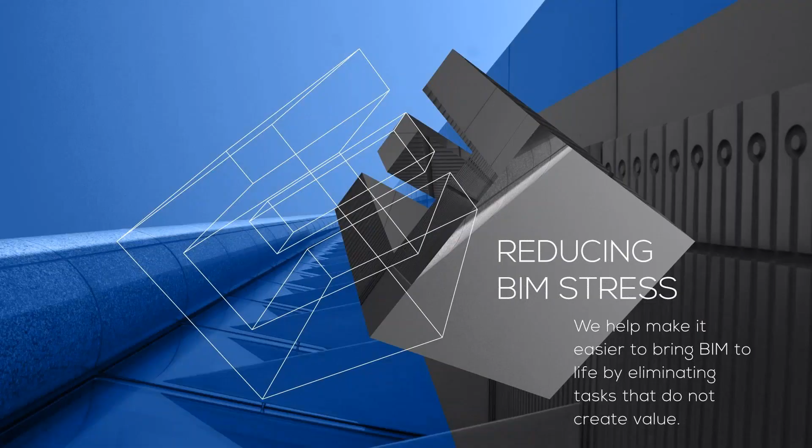So AGACAD, we are developers of different tools. We have a lot of them and we sell them worldwide. We do the training demos and so on, and Itannex, our partner, will keep you in your region. Our promise to our users is to reduce stress while implementing them, so we will continue to make these tools better and better, so don't worry about this.

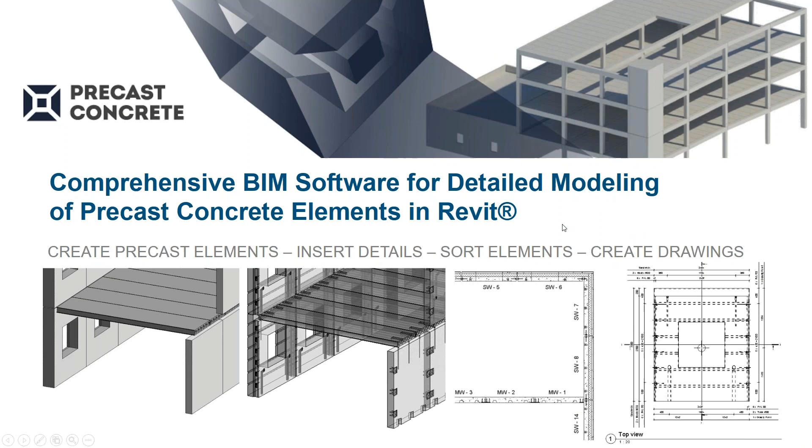This is all of our tools which we have currently in our portfolio. So we have Precast Concrete, wood framing, different cut opening, management of parameters, and different kinds of tools. Today I'll talk only about Precast Concrete. It can create elements, it can insert details, it can sort elements, and it could create drawings. It will help you while working with modeling and documenting precast elements.

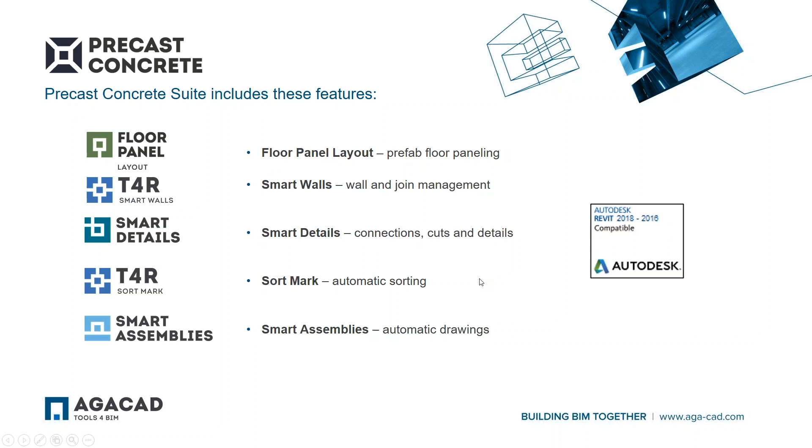So these are all the solutions included in Precast Concrete. We have floor panel layout to create prefab floors, then smart walls to split the walls into panels, then smart details to insert the elements and connections, sort mark to automatically sort elements, and smart assemblies to create drawings. So you'll see how to split walls, how to insert connections, how to sort elements, and how to create drawings today. All 4 solutions I will show.

And now I will switch to Revit screen. Okay, I will minimize this window. Now you should see my Revit screen. I'll make some things in this model. If you have questions, just write them, I will try to answer them at the end of the presentation.

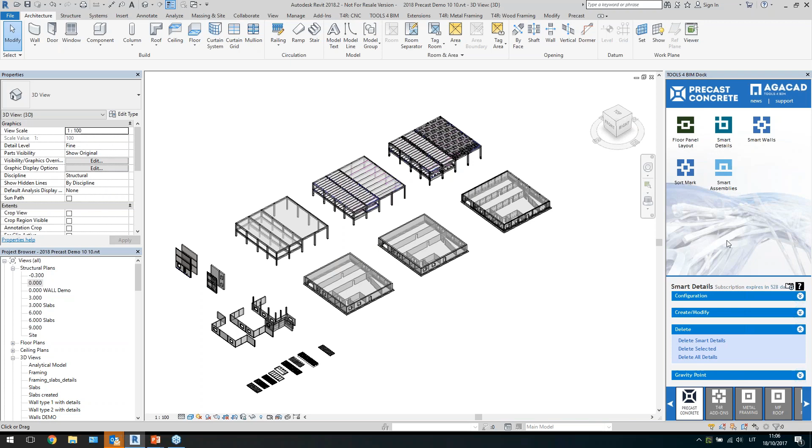Now on the right side you see Tools 4 BIM Dock. This is our solution which you can install in Revit and try our solutions for a 2 week period, free trial. Over here you see Precast Concrete, so today I will talk about this one. You can apply this for framing elements, floor elements, or wall elements, but today it's about walls.

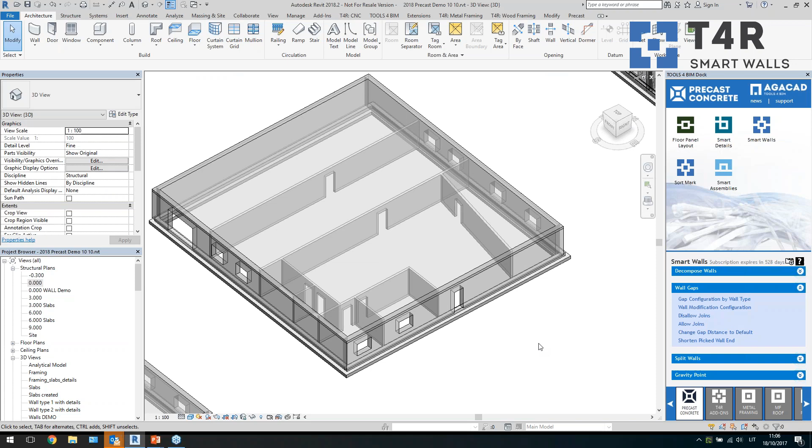So let's get started. First of all, I will select the Smart Walls tool, and over here we have different commands, but let me show you just a couple of them, how to work with them. First of all, I'll switch over to the floor plan view so you could see it better.

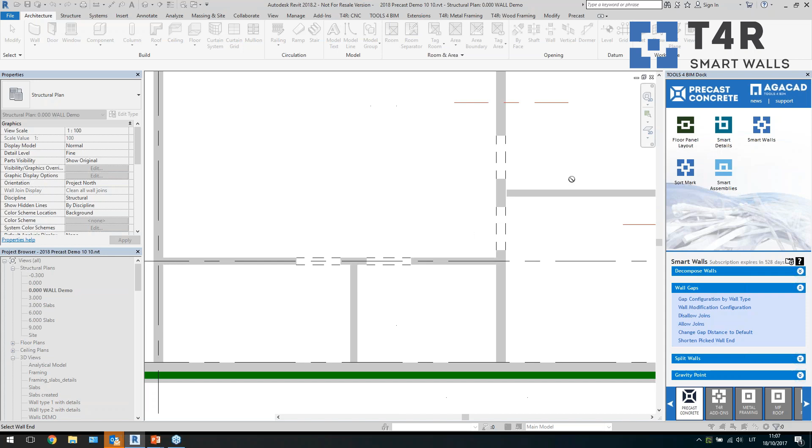First of all, I will use Shorten Picked Wall End, and what I want to do is when I select the end of a wall, you will see that walls are disjoint and the gap appears between the walls. So you can go around your walls like this, for example, just to make sure the connection changes between them. So in the corners, I can switch over the connection between elements. So this is one of the options.

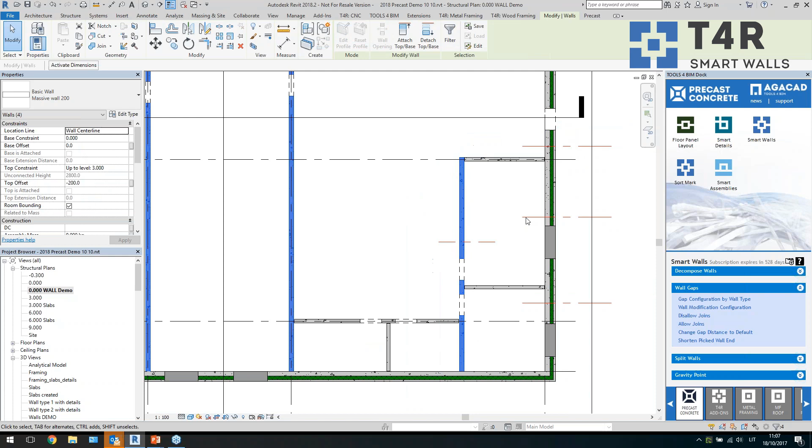Then let's say I will select all of these, this type of walls, in the window, and I will disallow joins.

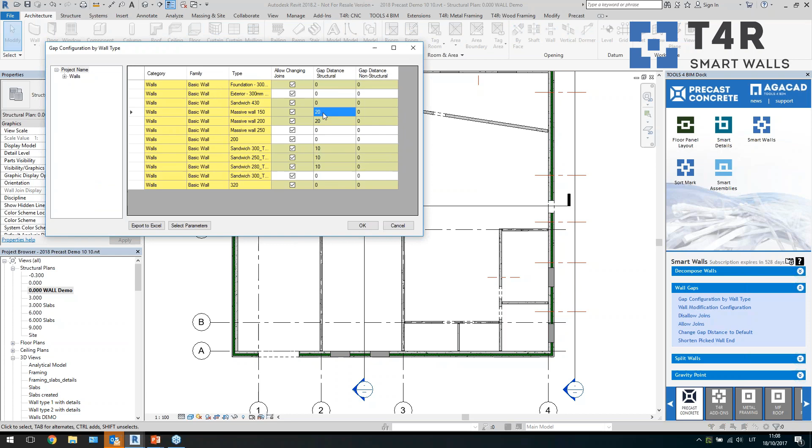So what it will do is disallow the join between walls and add this gap between the walls. So why do I have this kind of gap? We have gap configuration by wall type window, so we can set up what kind of gaps we want when we disjoin walls or when we split the walls.

To split walls, we have an additional split wall menu. Here we have some settings for how to split around the openings, what should be the size of the panel - we can change that - and what should be the maximum panel size. You can use these settings to split your walls.

So let's say I will select a couple of walls and split it from openings. Now you'll see this panel around the openings is created.

But let's see another command. Let's say I select a couple of walls again and split from the selected direction - split from the start. We have some limitations for the minimum size of the panel, so you can change these settings in different ways, and it will not split if it's not meeting required dimensions. Let me do that again.

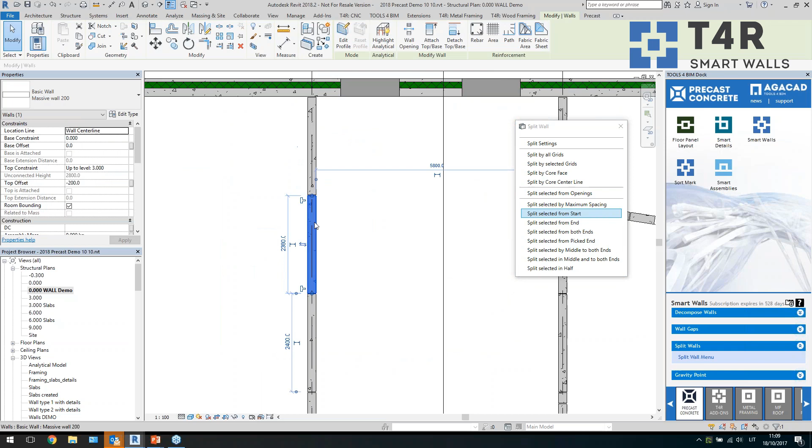And this time you see I have my wall panels created, just split in the same panel sizes, and the leftover is left like this. So we can split them like this.

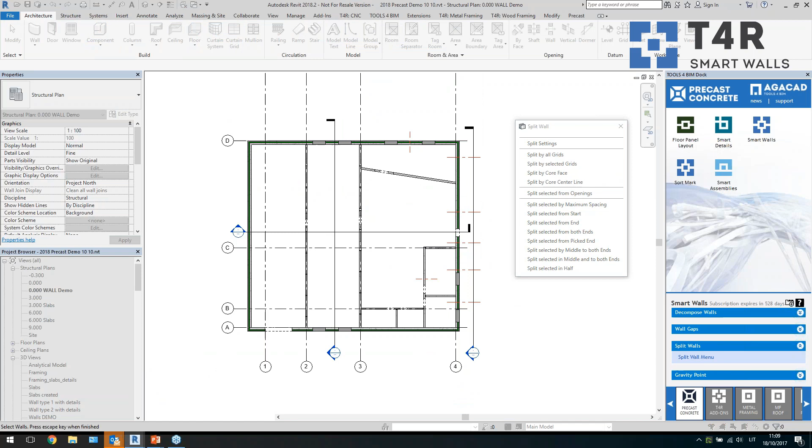Another option is to split in exact locations. Let's say I have a grid line - I can draw it in the place where I want it to be, and then select my grid lines and split by them. So split by grid lines, this wall, hit escape on keyboard, and then we have these elements created.

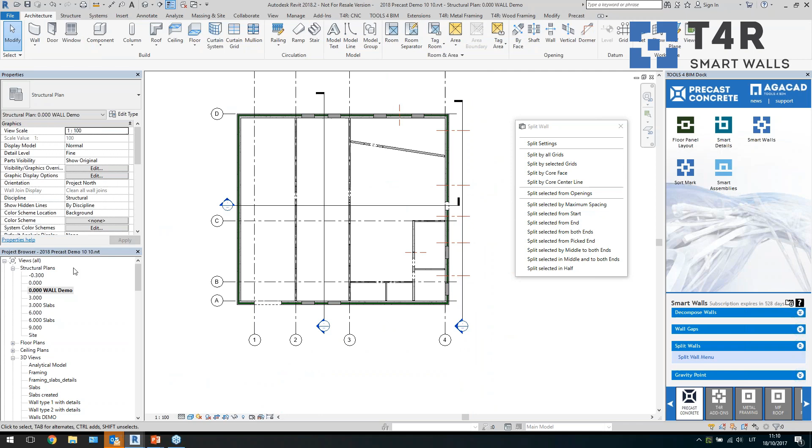Let me do that one more time: split by grid line, escape, wall, and escape. So I would have another panel over here. You can go around, play with it, just make sure it is like you want it to be.

And the next step is, if I'm good with the panels, I can go around, switch over to Smart Details, then insert some details. So how Smart Details work is that it will place your elements based on configurations.

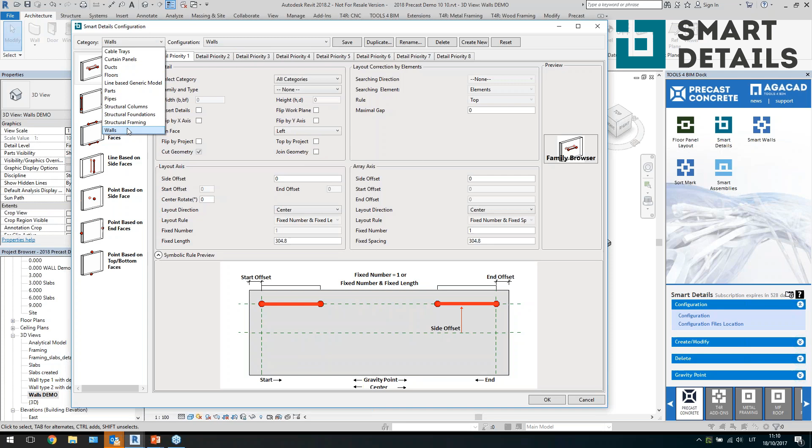Let me show you the configuration window. Here you have different categories to work with Smart Details - you can use Smart Details on curtain walls, ducts, floors, framing elements, columns, walls, and so on. You can place line-based details or point-based details on the selected faces, as you can see in these pictures. Let me switch to one of the configurations.

Let's say on the top face of wall I want to insert this family. I can select families from the project, which are already in the project, or I can browse it from this family browser. So I select my family, which I want to insert, and select it to insert.

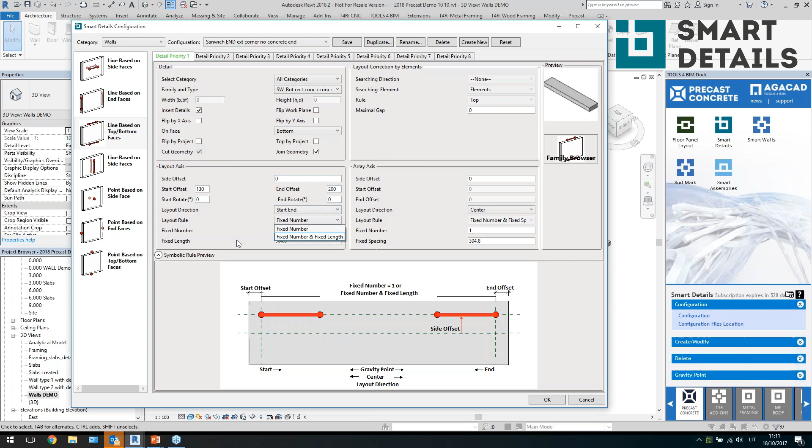I have flipping options - I can select if I want to place it on the top, on the bottom, or on both faces. At the layout axis, I have the possibility to define the rules for how it should be inserted. These are the settings for how this detail will be inserted in one direction, and these are the settings for placing it in the other direction. You can do that for line-based details and for point-based details.

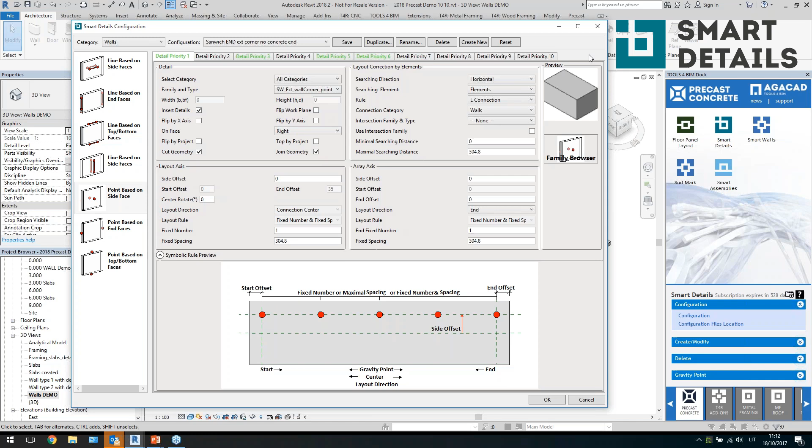For point-based details, additionally under layout correction by elements, we have the possibility to search vertically or horizontally for other elements' intersection. Let's say in this case I'm searching horizontally for other walls and for the connection between the walls - basically when we have a corner between the walls. We also have other types of connection between different elements, which could be beams and so on. So we can find intersections and place the detail only in this kind of situation, which helps you quickly insert the details.

I'll close down the configuration window, and I want to mention that all the configurations are saved in a desired location, so you can keep your configurations in different places. Let me close down this window, and let's go ahead and insert a couple of details.

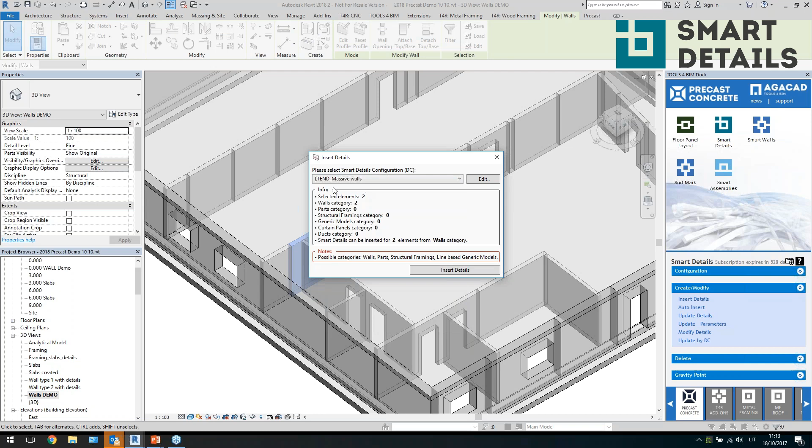I will select a couple of walls, click on Create, Insert Details, and now from the list of configurations I just need to select the configuration which I want to apply for these walls. Where is it? Okay, it's over there. So I select the configuration I want to use and click Insert Details, and it will place the details on the selected elements based on the configurations.

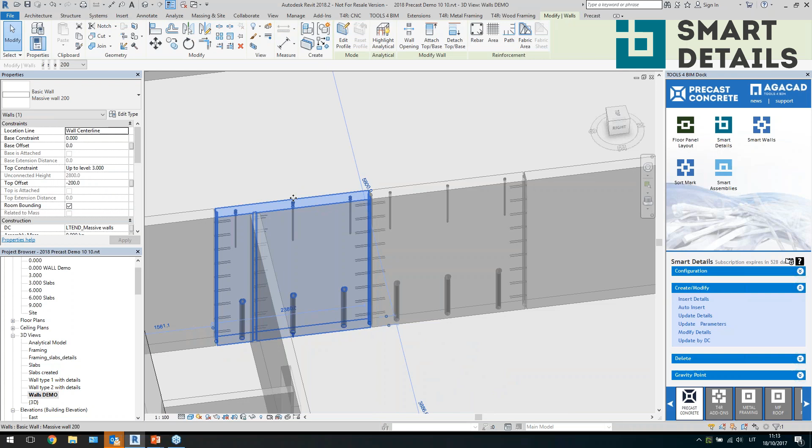So we will see the result. Okay, so now it's starting to place. Okay, that's the result. So you see now, let's say I selected to place some details on the top, some details at the bottom, some details at the edges, at the start and beginning, also the cut at the end and beginning of my wall.

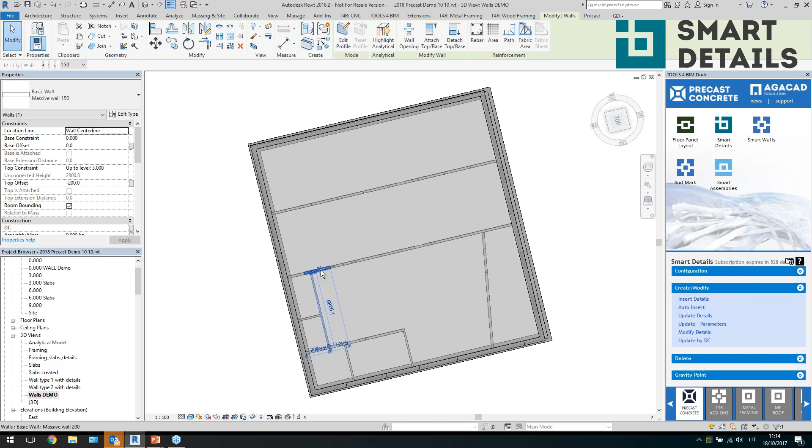And we have a little bit difference between these walls, because in this wall we have intersection with other wall. So that's why the solution automatically finds that we have T connection between these two elements, and then it will place this detail only if we have T connection. For this wall we don't have, so we don't have this detail.

If I select this detail and click on Modify Details, it will bring me straight to the configuration of this detail, and you will see that I was searching the T connection for these details.

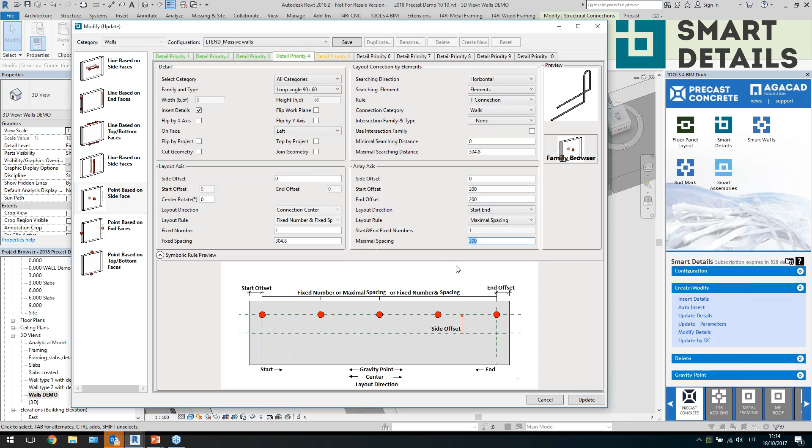And anytime you can make individual modifications for the selected wall. So let's say you need to make some small tweaks. Let's say in this case, I just change the spacing of these details. So you can anytime modify, delete, update details, follow the changes in your project and so on.

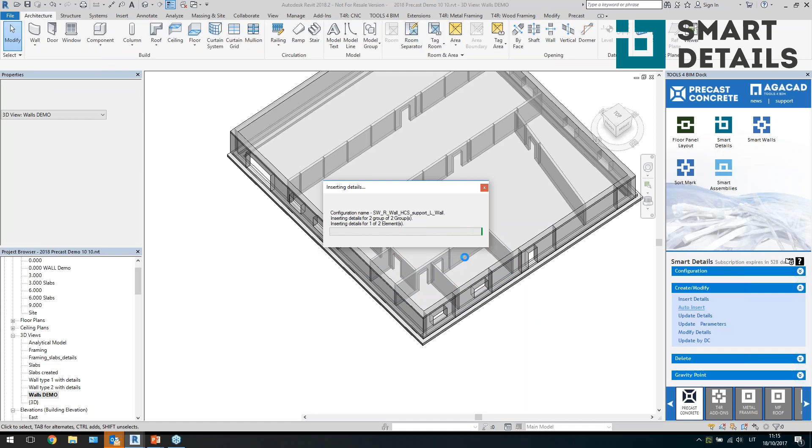Okay, I will select a couple more walls and show you other situations. Let's say I will now click on Auto Insert. And what does it mean? It will read the name of configuration from the properties of the wall, and it will apply that configuration which is selected for these walls. So I selected two types of walls, so that's why I have two different configurations.

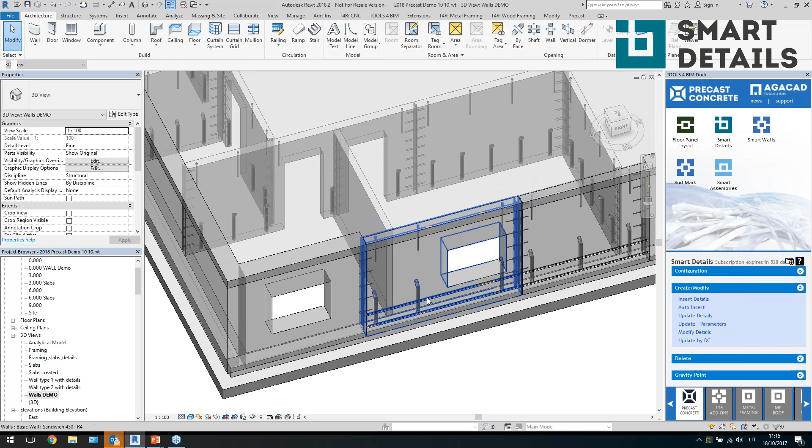So for this wall, for example, I have a different kind of loops. I have some other kind of details. I have some void at the top just to place hollow core slabs and so on. I can show you in the plan view how it looks. Over here I have this kind of cut just to place my elements like this. So I can go around and create stuff like this.

Over here, let's say I have an L connection between walls. So again, this detail was inserted only if we have an L connection between walls. So these are a couple of features.

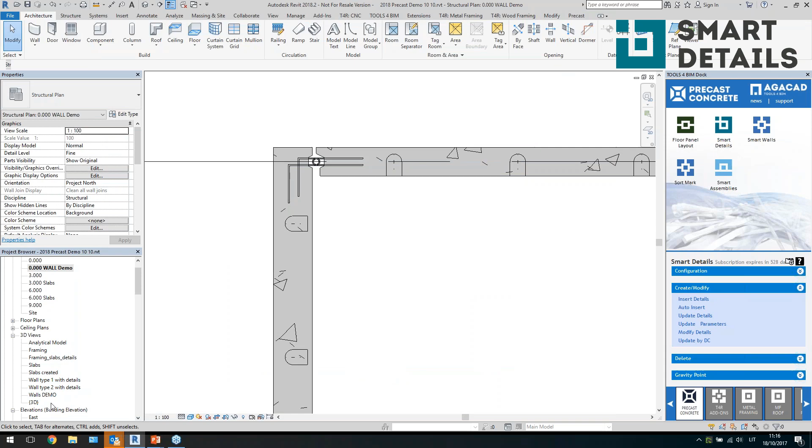Let me switch back here. And you see I have a window here, and I'm missing this kind of detail. So let me show you why. It's because we also have the possibility to check if there is enough solid element space.

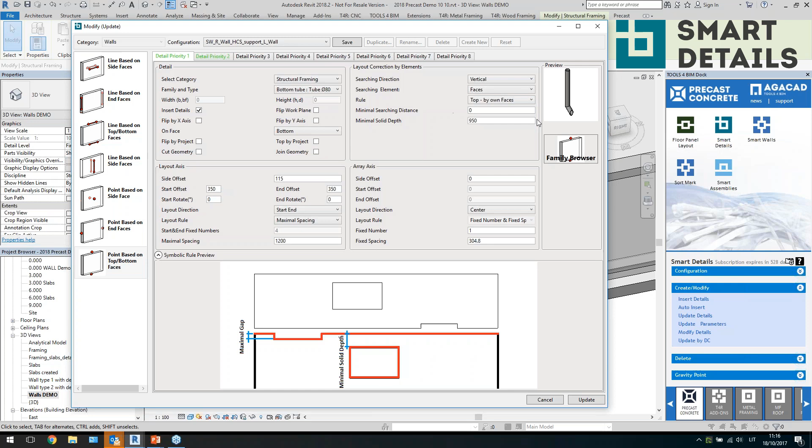So you see in this picture, we can check it. If there is enough space, we'll insert this detail. If there is not enough space, it will not be inserted. So you can see that it was not inserted under the window.

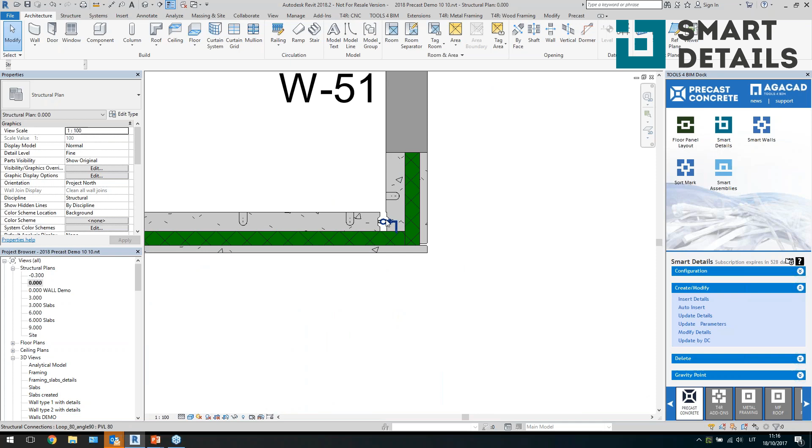So these are a couple of examples. I will show you maybe an already finished result over there. Switch here. So a couple more examples for the sandwich walls. So connections are more complete than in the previous example, but yeah, basically that's what we can do with this type of walls. Then let me switch back again to 3D view.

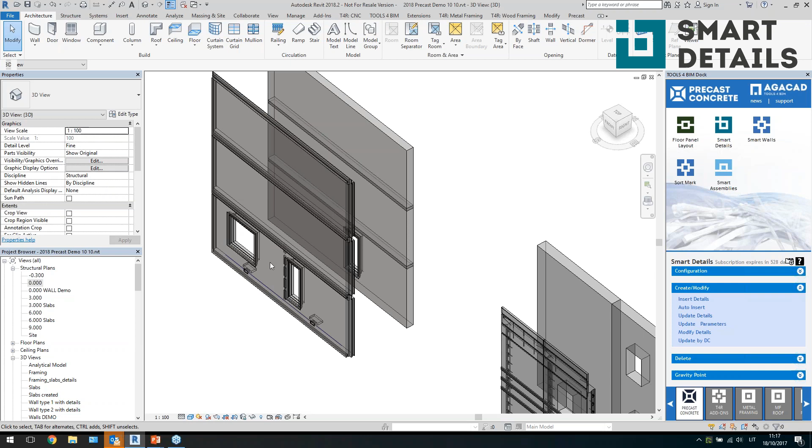And I have a couple more different walls. So let's say over here. So I will switch over again to the plan view, to this view, and to the section view. Let's say I have walls like this. I have a window inserted already.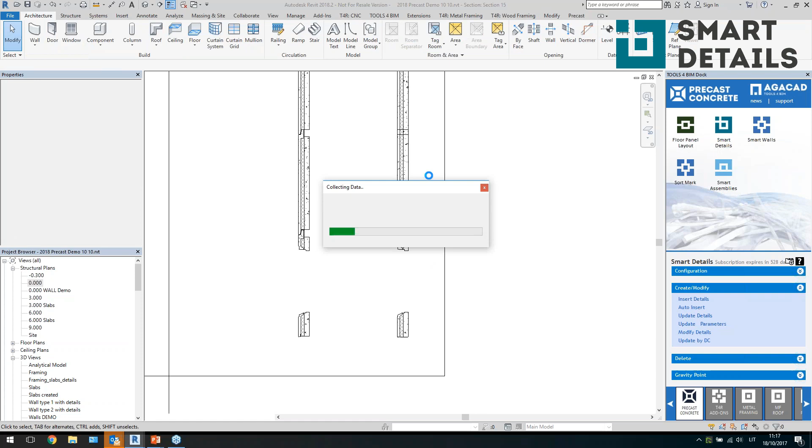So I can select these walls and I will show you another example. Just by clicking on Auto Insert, I'm reading the name of configuration in the properties. Let's say this wall has a smart detail configuration parameter and it has the name of configuration which should be applied for this wall. So it's the same for this wall and this wall.

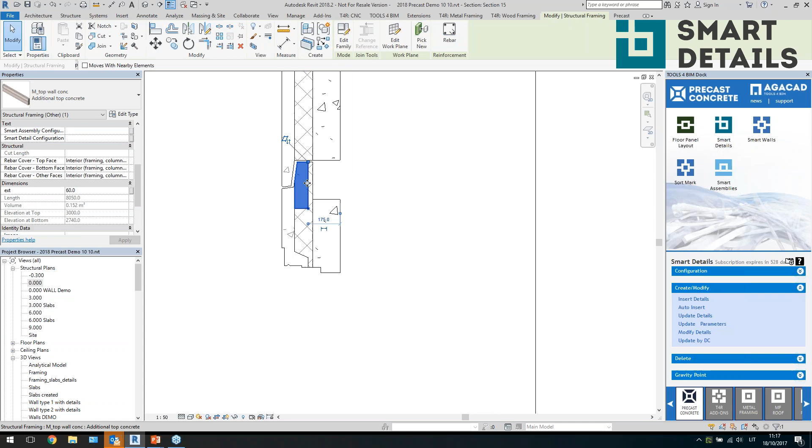And this time I have inserted just a line-based element on the top to cut the wall and then an additional concrete element to go inside the wall. So we can have pretty complex forms of elements just by using families and the smart details.

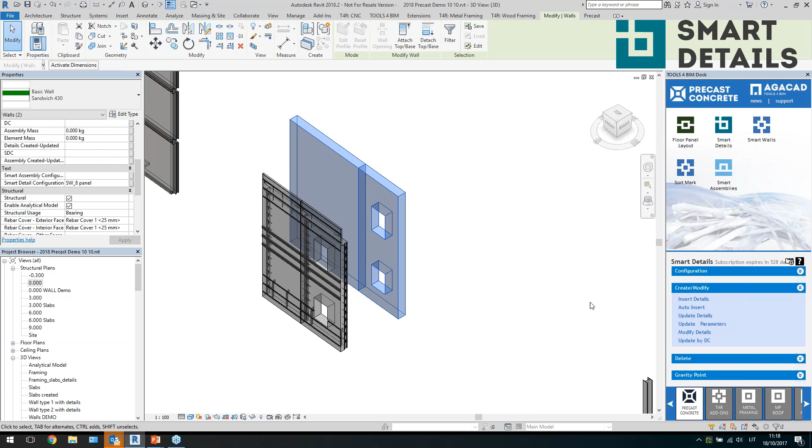Another feature of smart details is that, let's say we have different sizes of elements of the walls, right? And then when I insert details, because it's based on rules, the details are distributed across the wall. But additionally, we can read information from the host element.

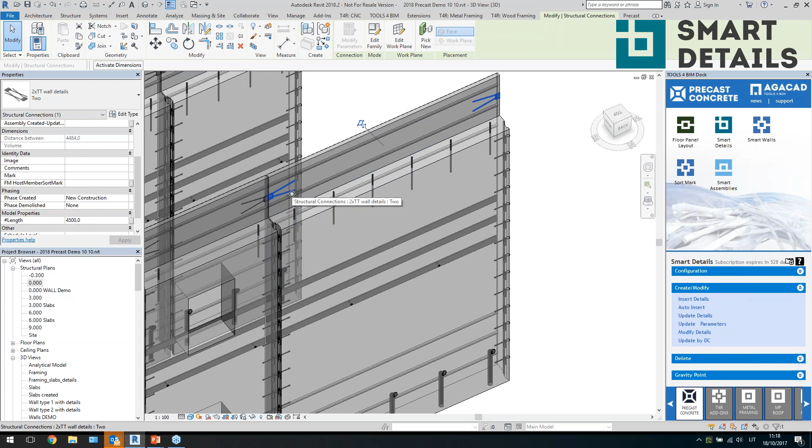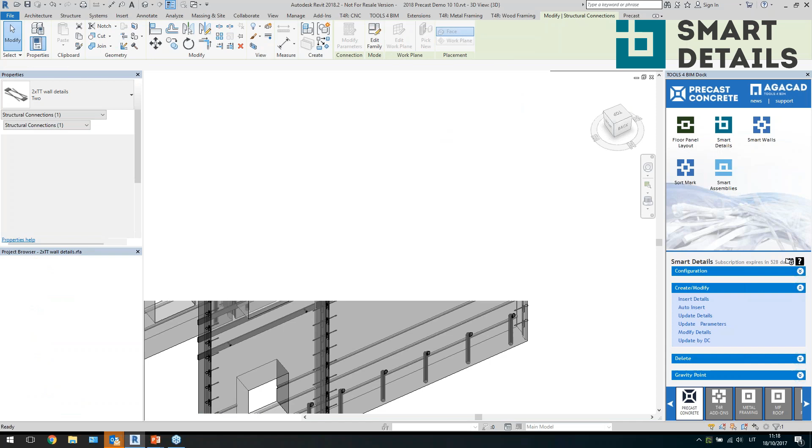So you see two details placed as one family here. The reason it follows the size of the wall is because I can read any parameter from the host element. So when I create this family, I can have this parameter reading the length of the wall. When the length of the wall is different, the distance between my details will be different, and it will adapt to the size of my wall. So that's another great feature of smart detail - you can use that on different sizes of elements.

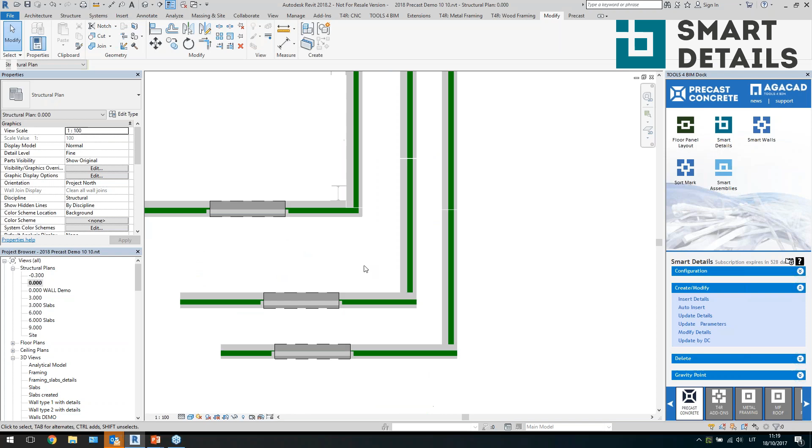Let's say another example - if I go here, you see I have another type of sandwich walls here. So I can place this kind of cut, this concrete detail, to have a good view of my walls. Over here, let's say the thickness of the wall is 300 and this one is 280.

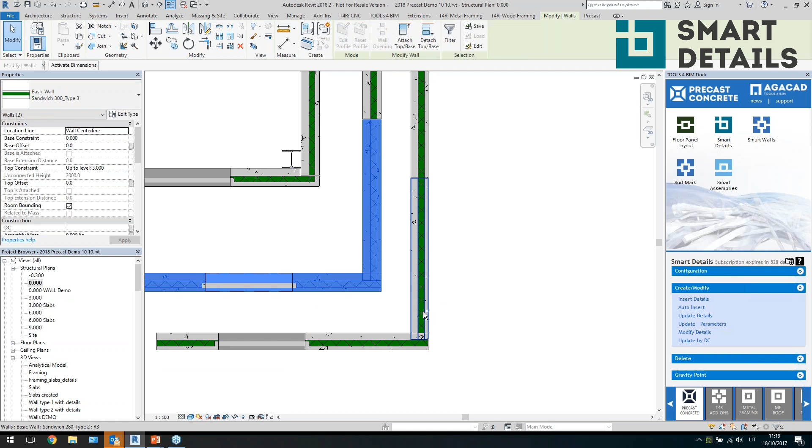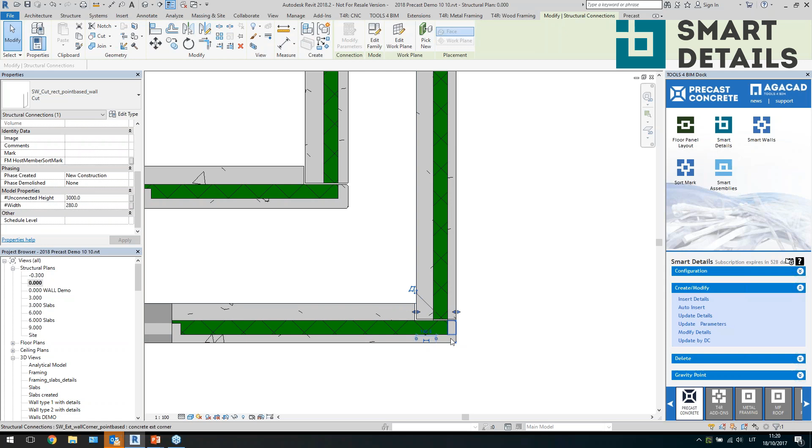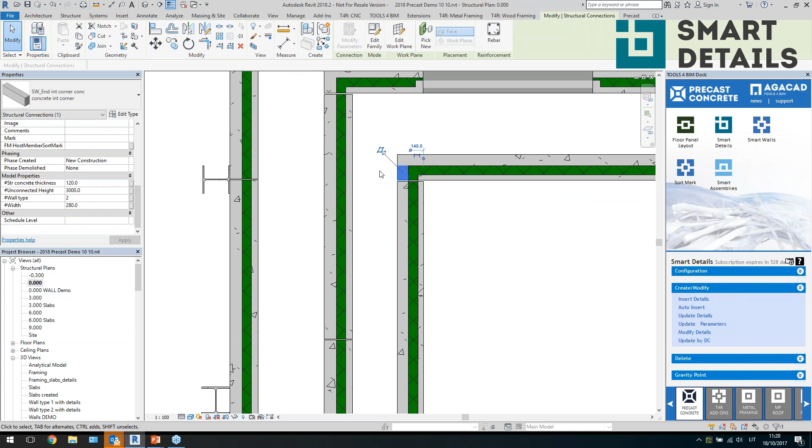But when I try to insert details into these walls, I'll do that again. I have configurations entered for these walls, so I don't need to pick that from the list. Now you'll see that this detail is reading the width and unconnected height of the wall, so it's adapting to the size of the wall. Over here, this detail is also reading the connected element's width and other parameters from the host wall. So it could be applied in different ways, and the same family will automatically adjust to the sizes of the wall.

So you don't need to create many families, you just need to add these parameters and use them.

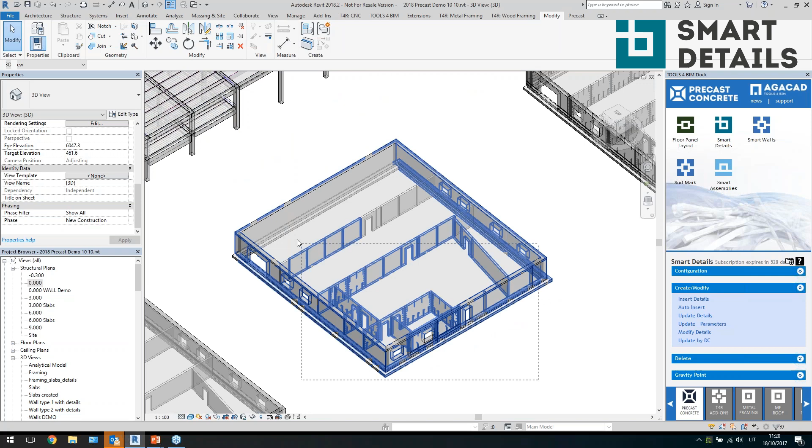Okay, so that's the way you create walls, right? And what else can you do with Precast Concrete? Before we start creating drawings, we need to have the Mark value, because the Mark value will define the name of the assembly, the type name. Right now my Mark parameter is empty.

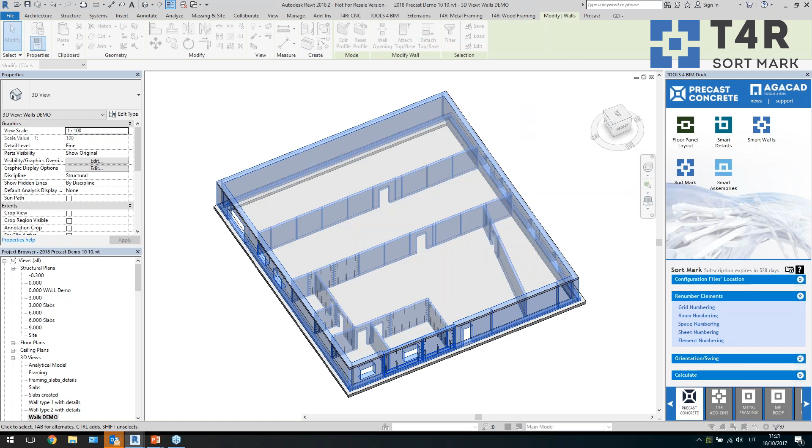So what I'll do now is switch to this view and select all of the walls. I'll filter them, just a selection, and switch now to sort mark, go to renumber elements, element numbering, and here I have the possibility to choose a parameter - where do I want to write information.

So I'll choose mark, and here are the configurations for the automatic numbering of the walls, or selected elements, or any other category of elements. It could be used on any kind of elements - for selection or for the whole category.

So we can group elements by any parameter, instance or type parameter. Then we can filter, let's say filter by length of walls, so it only renumbers selected filtered walls. Then we can add any parameters which will have influence on the mark of our walls.

Let's say I'll do it like this - I'll add a couple of these and maybe even the type name. So if these parameters are different, the number will be different. We can also use ID, so all of them will be different, but let's just stick with that.

We can also save configurations here. Then sort elements - you can sort them again by different parameters, like level name, level number, position in the plan, and so on. We can just add, let's say, position, then sort mark. In the last stage, I'll select this parameter to add to the mark - this is a calculated parameter based on these settings.

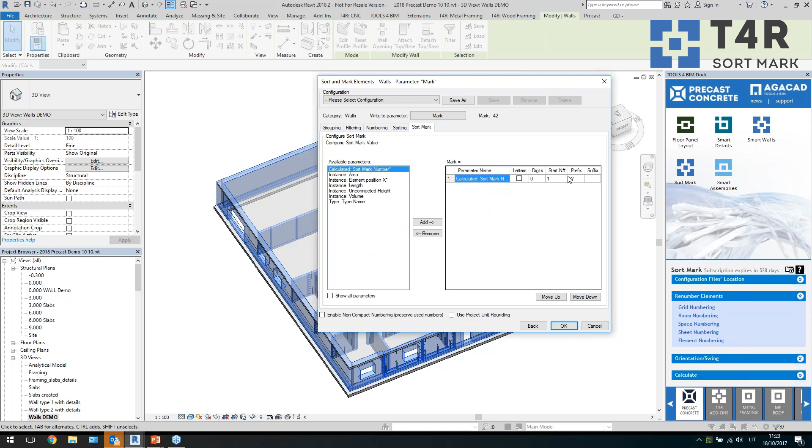So I will start numbering at 1, and I'll add a prefix like this. Actually, I can add any information here - it could be any information, but this time I just want to add a number. So I'll keep it like this and click OK.

42 elements were renumbered. Some of them will have the same mark values, probably because of my settings. So now I have the mark value for all of them, and I will select that and go now to Smart Assemblies and create an assembly - this is just another solution for the automatic shop drawings.

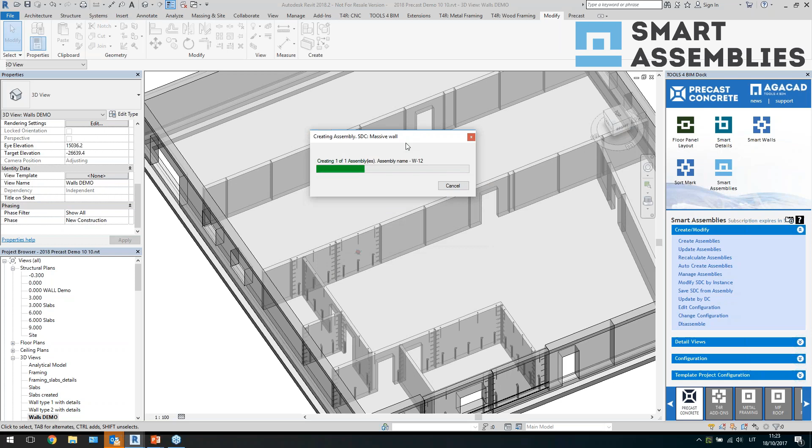So here I have some configurations for how the view should be created, and I will just create that. What Smart Assemblies will do is gather all the hosted elements together in one assembly automatically, and it will create views based on the configurations.

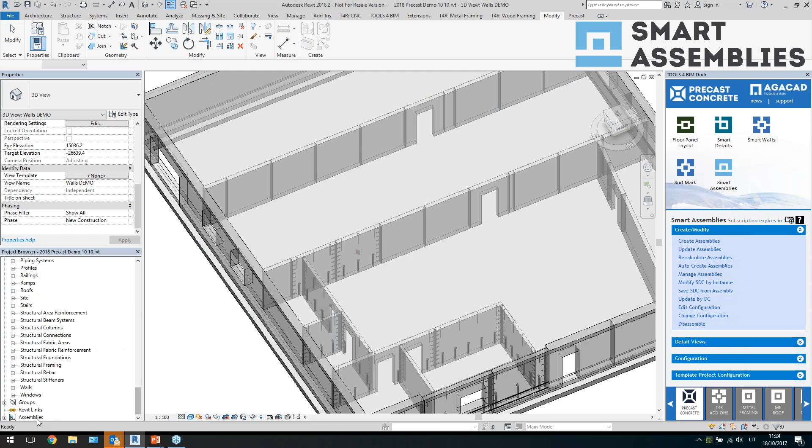It will place dimensions based on configurations, and it will place views on the sheet based on the template project. So now the assembly is created. Let me show you the result, and I will talk about how it happened. So let's switch over. Now the assembly is created, and the views are placed on the sheet.

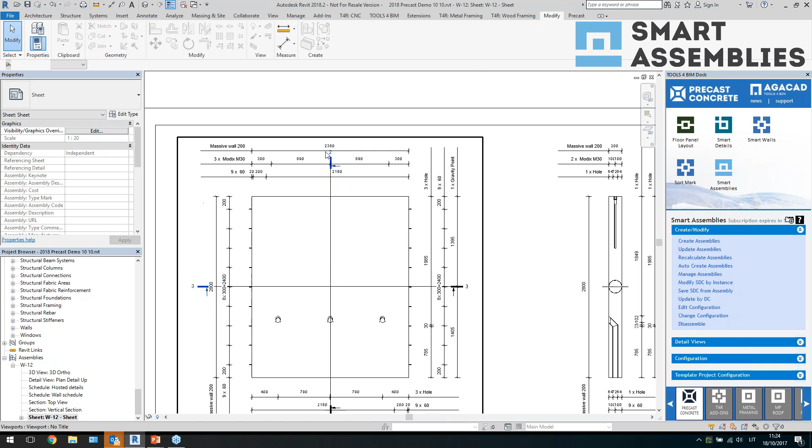As you can see, I have the automatic dimensions following the loops, so I have the dimension chain. I have the overall dimensions, gravity point dimensions, and cut dimensions if I want to. So I have schedules in my sheet.

I have a 3D view. So everything is based on my sheet template, which I have in the template project. Let me show you how this happened.

So Smart Assemblies has shop drawing configurations. Let me open that for you. And then you see here, I can add a view. I can select the direction of the view - it could be a legend view, standard views, or flipped versions of the views.

So I can select that. It could be an assembly view or a model view, so it will place the section in the model, or it could be an assembly view. Then it can automatically rotate the view, set the view type, and the name of the view - you can enter whatever you want - view template, visibility settings, and the dimension rule.

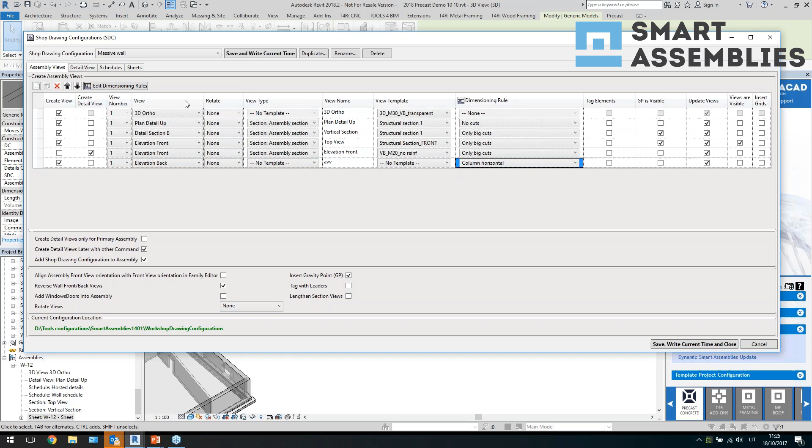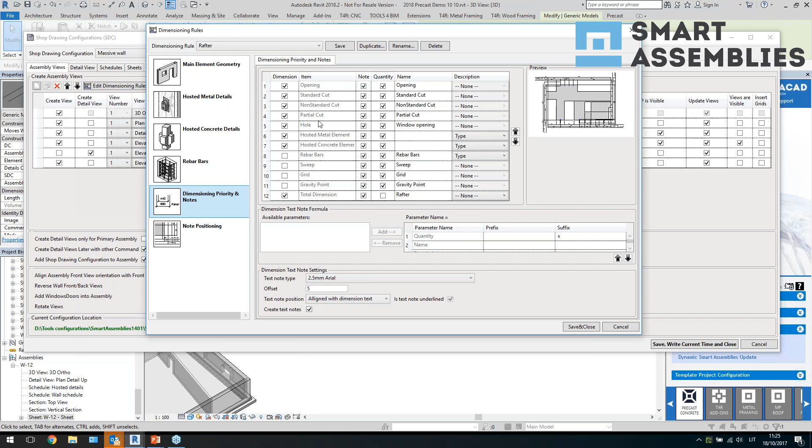So what are dimension rules - this is a window with settings for how to dimension the main element, how to dimension cuts, non-standard cuts, openings, how to dimension metal details, concrete details, how to dimension rebars in different views, how to dimension elements, and where to place dimensions, what note should be included in the dimensions.

So you have a lot of options here. The style of dimensions, the style of text, could be modified of course. Over here we have the settings for the notes and so on.

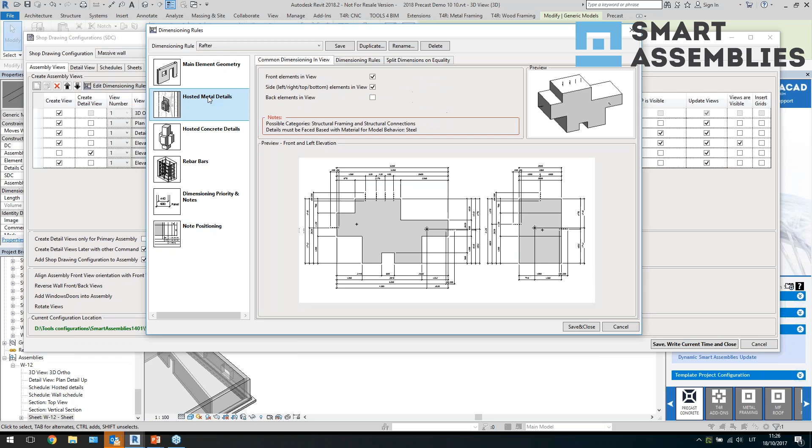I would like to make a special note about the hosted metal details. If you have an element in your project like this, it could be dimensioned anywhere, right? But you can do it like this - it will dimension only total dimensions.

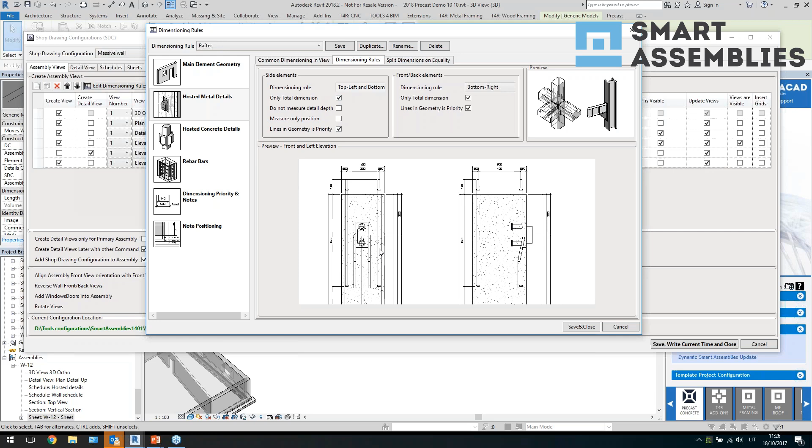Or if you have lines in the model - lines in the family - the dimension line will snap to that model line. It will neglect all the geometry, it will only snap to the model line. So basically it's unlimited, and you can have your dimensions in the exact position where you want to have them. That's about the views.

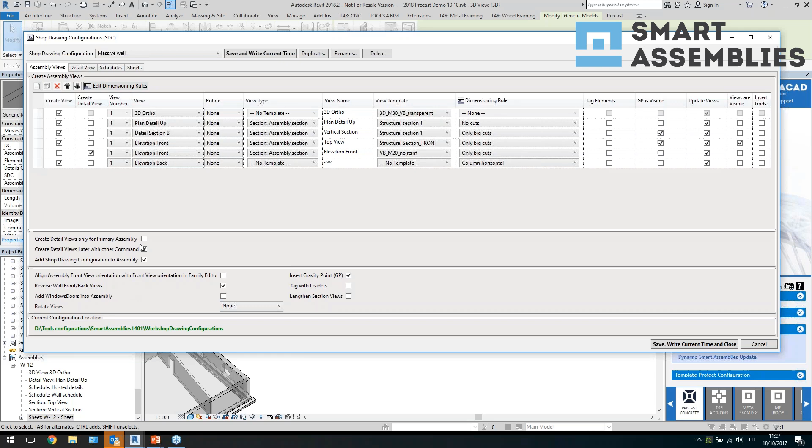We have some gravity point insertion tag options and some reverse options additionally here, but basically it just helps achieve the result you want. Now the detail view is just a name for the model view, which you may create for the assembly.

And then the schedules - these are the schedules which you want to create. Then you select the schedule template, and it could count the instance or the type.

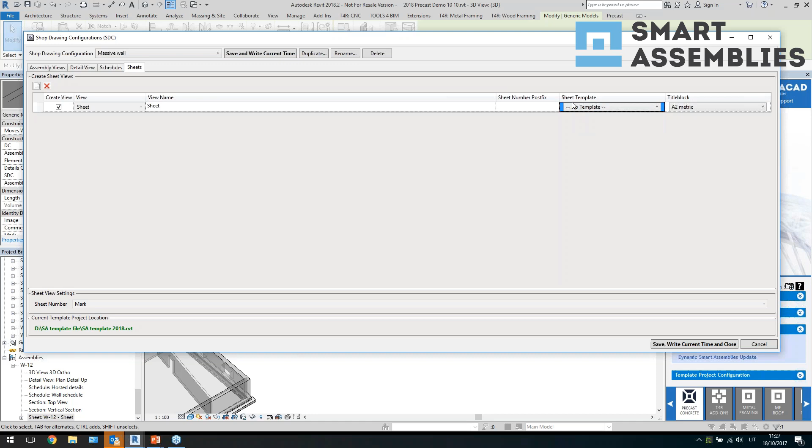The sheets - again over here you can select the created sheet to be a sheet template. But what I did is I have a template project. I can define where I have a template project, and then in the template project I can create my assemblies.

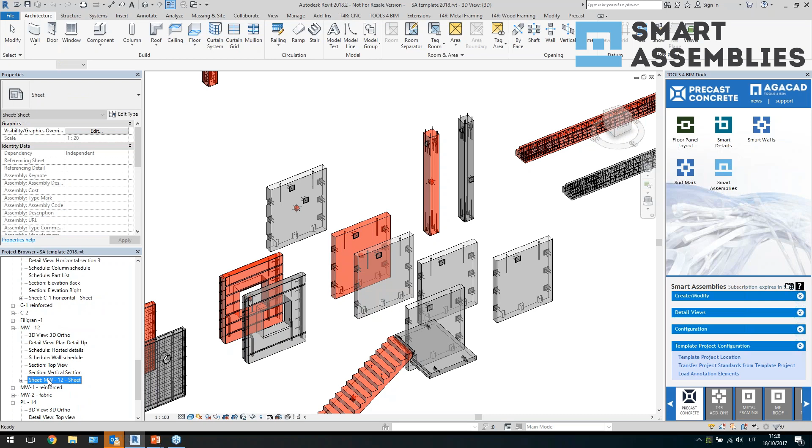Predefine how the view should be created. Let's say for the previous case, I was using the layout of this sheet. So I have this kind of wall in the template project, and then every time I create an assembly in this project using that configuration, the views will be placed on the sheet in the same order as in the template project. So that's another example of what you can do with Smart Assemblies.

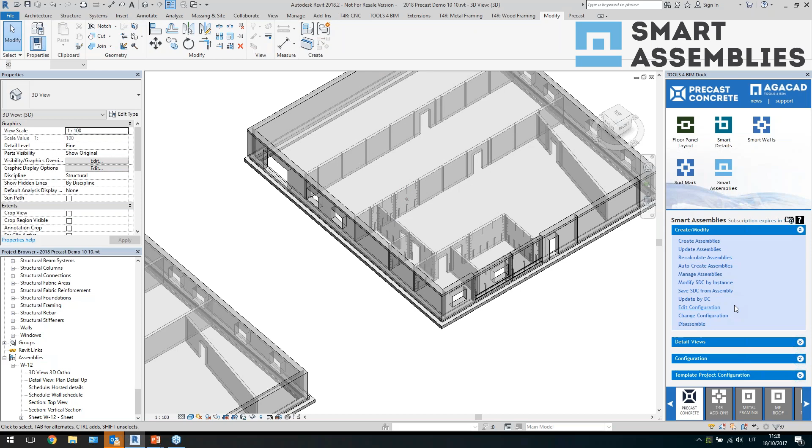Let me switch over to the template project, and I will show another example of the walls. So this is a simple wall as the previous one, very similar, just with plates and different kinds of connections at the bottom, but it doesn't matter because you can define how to dimension them.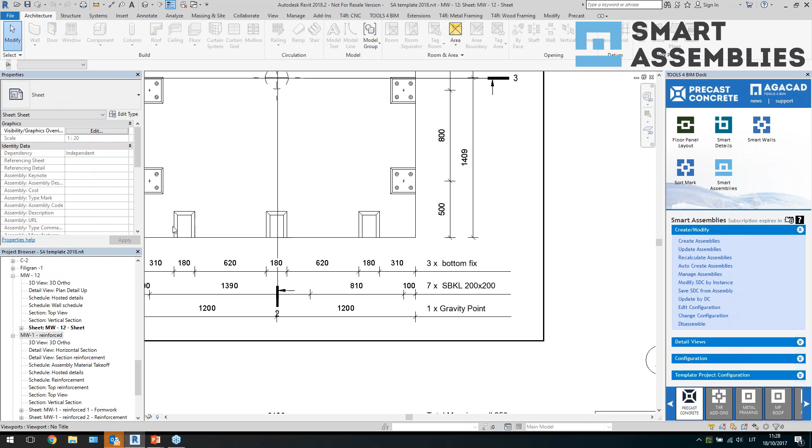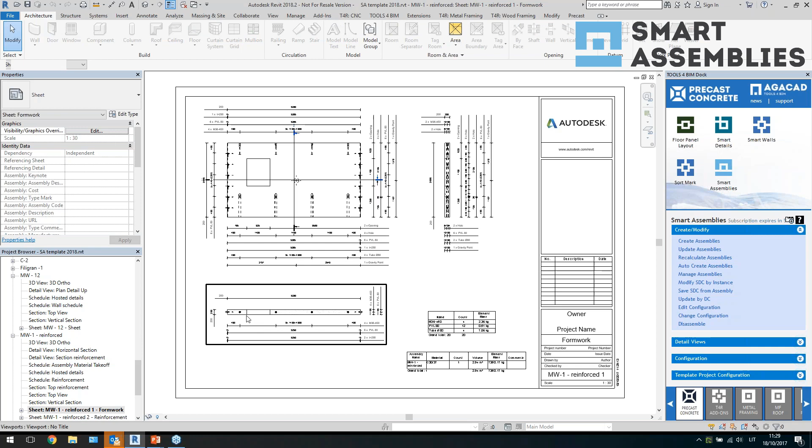Let's say for these plates, I have model lines in a cross, model lines in the center, so I have dimension lines in the exact position where I want to have them. So this wall - let's say I have a wall with rebars. Another wall, but this time I have two sheets. I have views similar to the previous one, but on the other sheet I have rebars, dimensions for the rebars, and a schedule for the rebars which I want to use here.

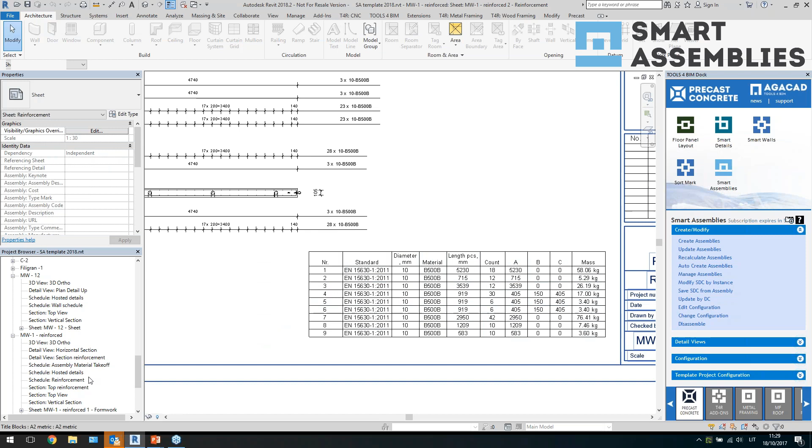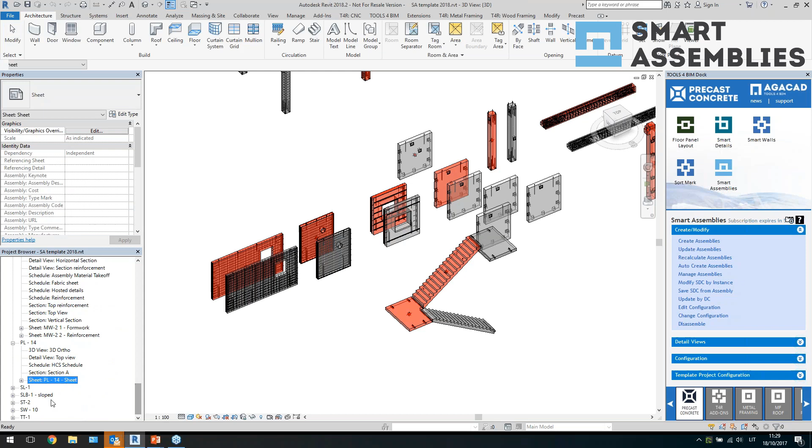Fabric could also be used, and it can have dimensions. These are different elements, not walls, but a sandwich wall maybe. Over here we have this kind of wall. So again, it depends on my settings, but basically I can have dimensions anywhere I want and dimension elements in a good way. All of this was done automatically.

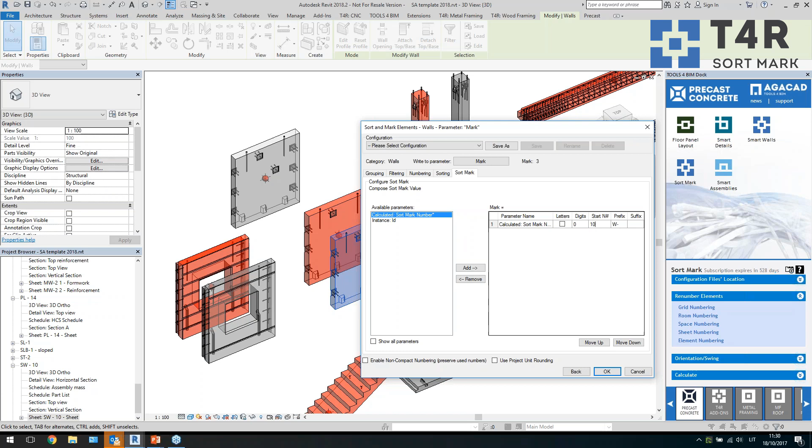Another feature of smart assemblies is that you can use, if I create a couple of assemblies here. These don't have element numbers, so let me quickly renumber these elements. Sort mark, renumber elements, element numbering, mark, okay. I will number them based on the ID, so we'll have different numbers. I'll just give them the starting point, let's say like this. I'll click OK, so now I have the mark values for the selected walls.

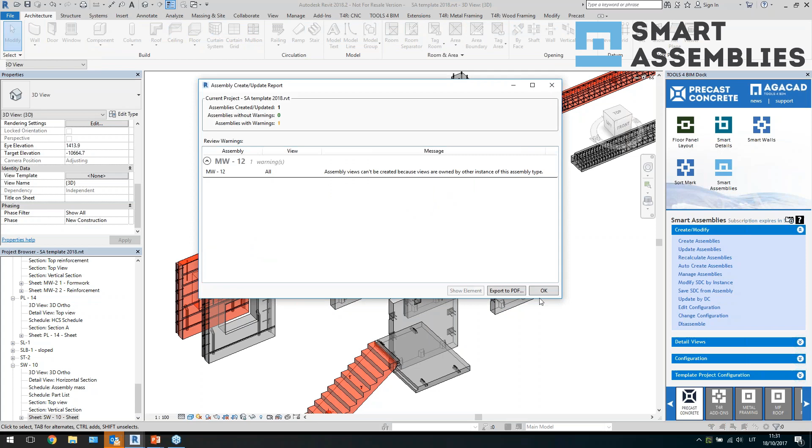What I want to do now is create assemblies from these walls. So I select the configuration, click on create, and you'll notice that if I select more than one element, it will create the same amount of assemblies. It means I'll have 3 assemblies, not one assembly like Revit would do, but 3 assemblies. That's another feature of Smart Assemblies.

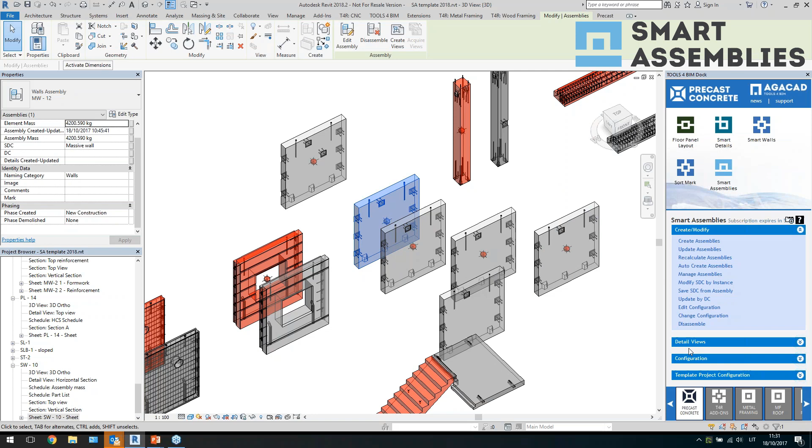Now what do I have? I have the Manage Assemblies option in Smart Assemblies, and I can use this command to find all the same type of assemblies in my project. I can also select to show the primary assembly. This one is primary, it has drawings. And why I'm showing this is because we have this kind of feature of dynamic Smart Assemblies update.

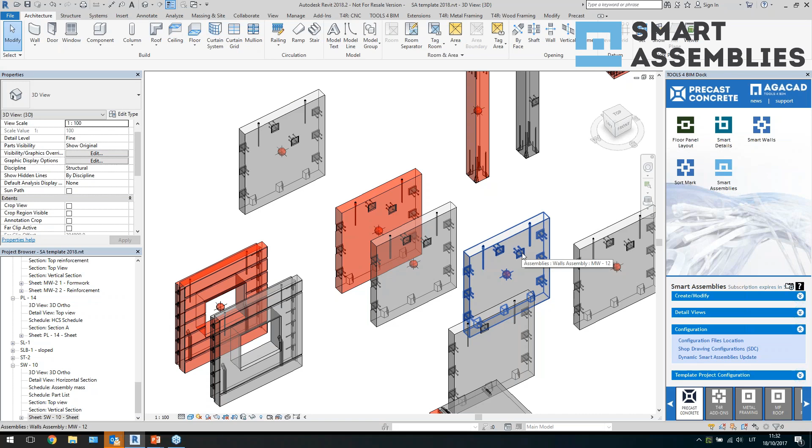It means that when I want to make changes to primary or secondary assemblies, it will ask me if I'm sure I want to make these changes. Do I want to make changes and update drawings? Do I want to make changes and just recalculate the position of the gravity point, or not make these changes at all? Let's click no and just update the assembly, and you'll see additional updates are now executed. This is because it's now updating secondary assemblies too, and you'll see these assemblies now also have their additional plate added. So that's the control, or possibility, to update all the elements at once.

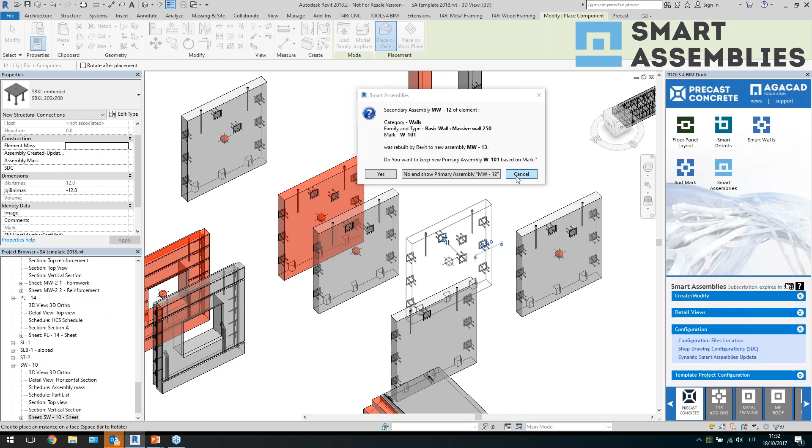When you have the same type of assemblies, it's easier to control. Let's say you want to make changes to a secondary assembly. Again, it will ask if you want to create a new assembly, what do you want to do. Maybe you don't want to do anything because you were just mistaken, or you didn't know you had the same type of assemblies somewhere else in your project.

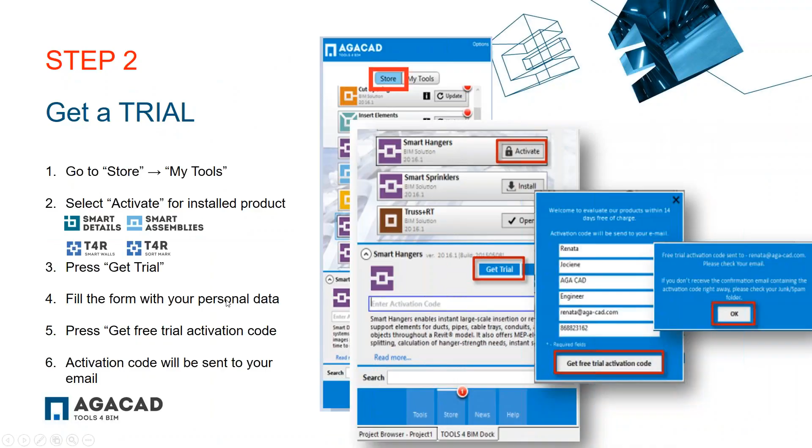Okay, so that's basically what we have about the solutions for the walls and precast concrete. If you need some help, you can click on this question mark and go directly to the help page. There you'll find getting started videos, webinar records, and some technical documentation explaining how to work with it. You can also contact us, or Bernard actually, and he will help you get through it. You can take a trial just by downloading BIM Dock from the web page and requesting the trial, and you'll get the codes to use it for 2 weeks.